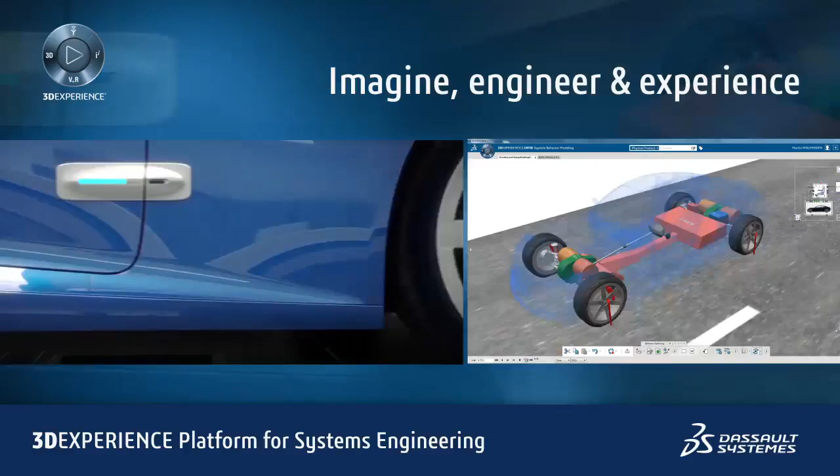The platform delivers an integrated model-based systems engineering environment to imagine, engineer, and experience high-fidelity digital replicas that accurately predict a product or system's behavior through 3D experience, just like in real life. But why do we want to put 3D experience at the heart of the systems development process?

Because 80% of today's vehicle innovations come from embedded systems. These systems account for 20 to 40% of vehicle development costs, and they are delivered as 7,000 technical and customer orderable functions that are defined by more than 300,000 requirements. The massive number of possible vehicle configurations makes it impossible to fully analyze the interaction of any one system with other systems within a real vehicle.

For more than 60% of the development time, no real prototypes exist. And even when they do exist, they are costly to produce, often incorrectly defined, and are utilized in a suboptimal way. Less than 10% of systems engineers get validation time with these prototypes, resulting in the late discovery of system errors that should have been identified at the concept design stage.

Typical automotive manufacturers and their Tier 1 suppliers use hundreds of disconnected systems engineering tools to implement these functions and systems. And in doing so, they create many thousands of models of the systems being developed, with each tool having its own view or model of the system.

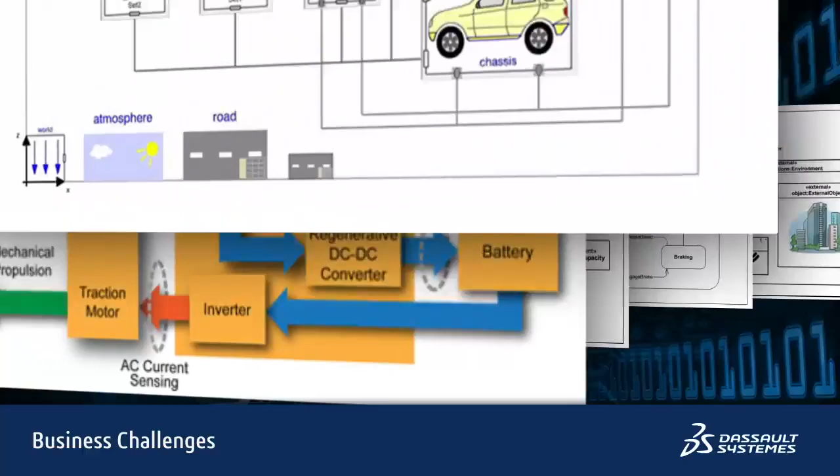But these individual models are largely disconnected from each other, as they are authored and managed by different legacy and proprietary tools. This limits cross-discipline collaboration and integration, making it difficult to build complete and consistent system views that integrate multiple engineering disciplines. It makes it extremely complex and costly to model and simulate the behavior of systems in the context of a complete vehicle, and also impossible to easily reuse system assets across multiple vehicle options and programs.

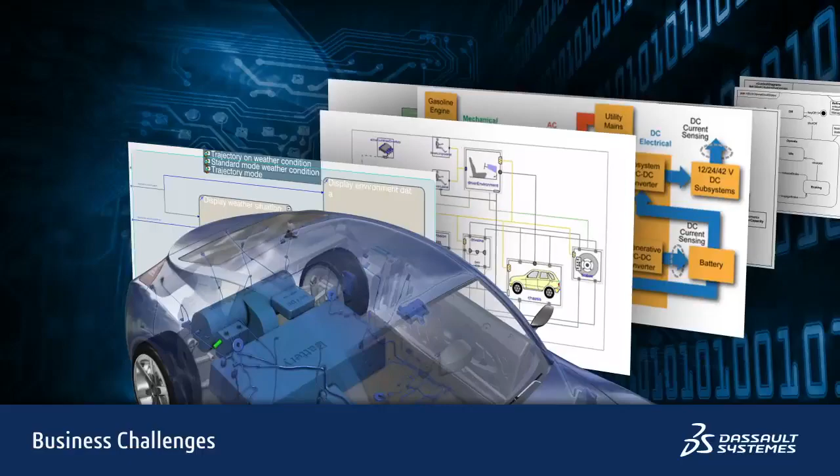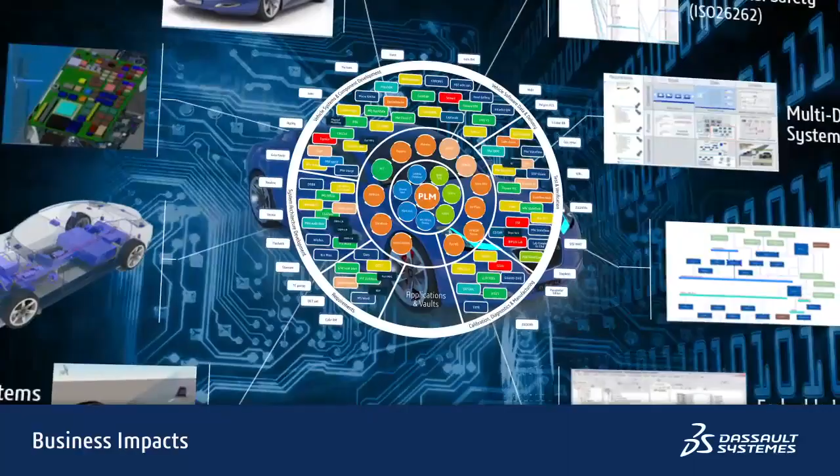The business impact of these issues is increasingly serious. Programs are delayed, products are poorly integrated with suboptimal systems, and design and engineering costs are inflated by unsynchronized and duplicated development effort. And it is getting worse. As product complexity and demands for variance increase, it becomes more difficult to master and optimize the development effort, often resulting in duplicated data that becomes difficult to manage across all programs, options, and variants.

What's needed to address these challenges is an integrated model-based systems engineering environment that drives the creation and management of digital replicas of existing or future systems to accurately capture or predict their behavior, just like in real life. We create these 3D experiences by using an open development environment that brings all engineering disciplines together to collaborate, define, and share a common and consistent systems definition.

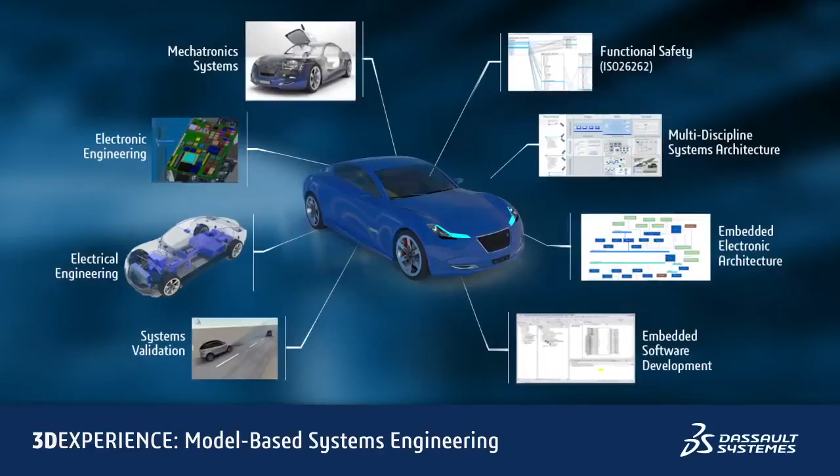A definition which we use to model and simulate the behaviors of systems in the context of the complete product and its environment, just like in real life, and reuse systems assets across multiple vehicle programs and model variants. Dassault Systèmes addresses these challenges with a collaborative and open 3D experience platform for model-based systems engineering. This platform enables users to design and experience products and systems through a continuous engineering development process.

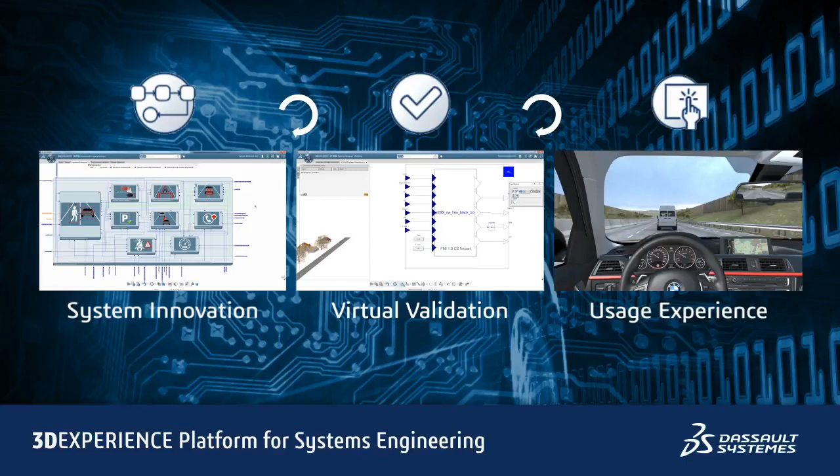Let's explore what we mean by 3D experience in the context of systems engineering. We provide an end-to-end solution with digital continuity to design complex products and systems, starting from their planned usage through to design and implementation, and optimize, verify, and validate these systems through virtual simulation at the conceptual design stage, reducing the need for physical prototypes.

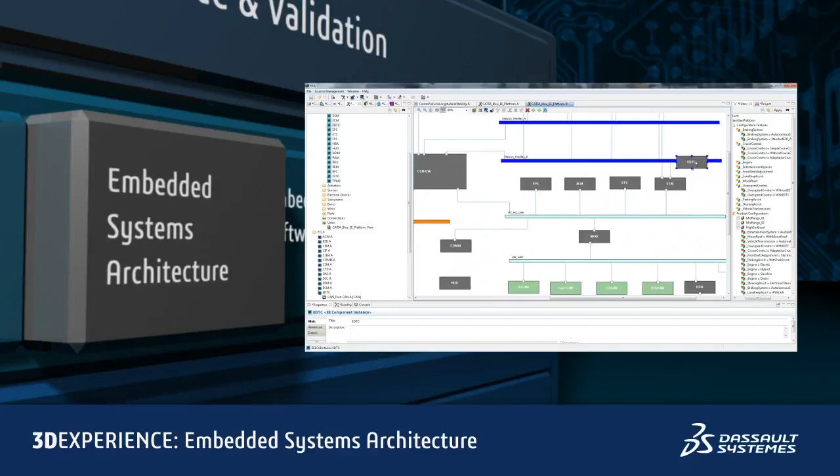This 3D experience platform is an open environment that can be used in conjunction with your existing tools and adapted to suit your processes. It comprises a set of integrated applications that cover systems architecture and requirements, to define and compose the system by considering multiple viewpoints through a set of integrated requirements and architectural models. Embedded systems architecture, to define, manage, and implement complete embedded architectures with electronic and electrical components and their interfaces.

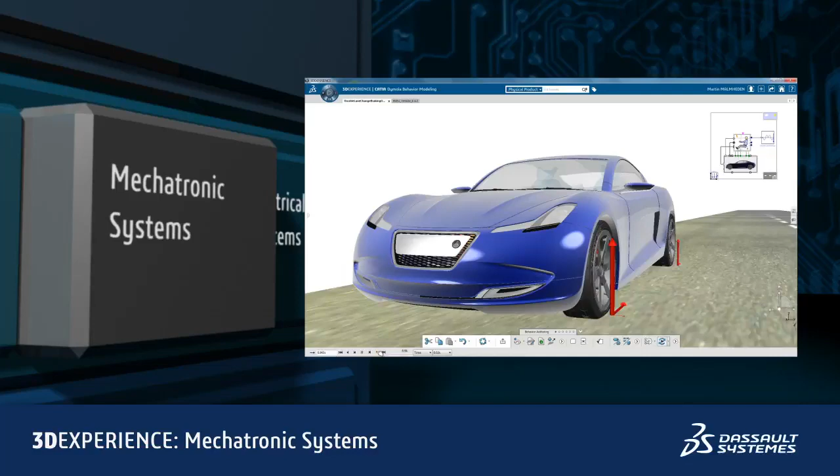Embedded software, a rich tool set for developing AUTOSAR-compliant embedded systems. Mechatronic systems behavior modeling using open standards, Modelica, and functional mockup interfaces, or FMI, where we simulate the system definition to predict and validate upfront the system behavior, just like in real life. And electrical systems, to provide the electrical interconnect between the many ECUs, sensors, and actuators within the vehicle.

We manage the creation and lifecycle of all of these systems assets through a rich collaborative framework that supports the creation, sharing, and reuse of information. The 3DEXPERIENCE platform accelerates time to value by delivering powerful cross-discipline collaboration capabilities that span all stages of the system's definition, design, simulation, and validation process.

Through powerful services for social collaboration, dashboarding, visualization, and content management, it provides a scalable solution capable of supporting systems development from the smallest to the largest and most complex engineering projects. Program and lifecycle management with configuration and change management of all assets and management of product lines, and use powerful tools to manage and document compliance with standards such as ISO 26262.

It integrates program and earned value management directly within the system's design environment, with task status collection and budget allocation and usage becoming a natural part of the design process itself. By collecting information passively throughout the design process, it provides decision makers with real-time assessments and gives increased confidence in information.